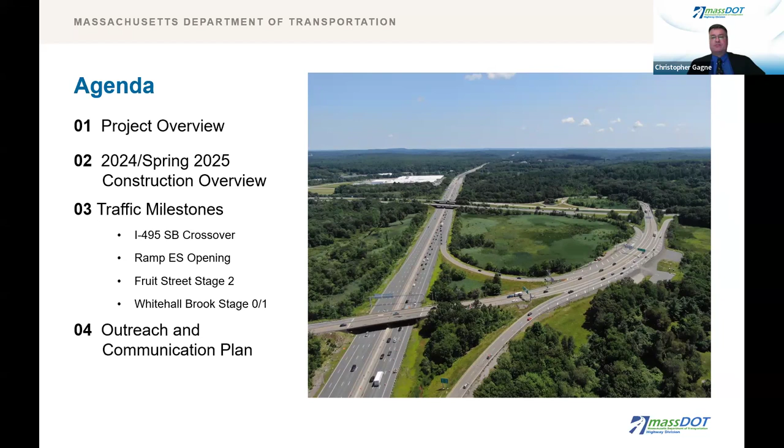Following the presentation, we will open the meeting up for questions and responses by our team. Also, it's important to note that there will be multiple ways for people to receive information about the project as it progresses through construction. These will be covered at the end of the presentation.

Tonight's panel includes representatives from Mass DOT: myself, Christopher Gagne, the PM, Jean-Pierre Telemaque, Assistant Construction Engineer from District 3, Joe Frawley, District 3 Operations Engineer, and our producers Hung Pham and Roy Kirwa; from the Design Build team, Mark Shamp, the Project Manager from Barletta Heavy Division, Howard Goldberg from Barletta, Don Cooke, the Design Manager from VHB, Josh Cone-Roddy, VHB's Highway Lead, and Keith Sonia from Regina Villa Associates, presenting on outreach.

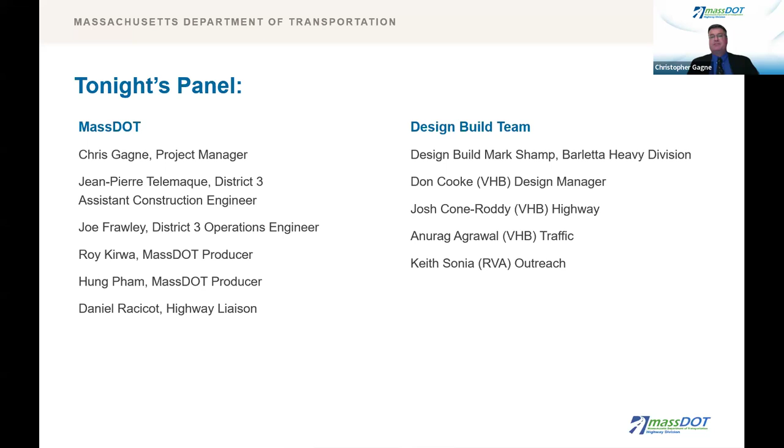Before we get into the details further into the presentation, I want to make some high-level points about the project. This is one of the largest projects MassDOT has advertised for construction since inception in 2009. It is the only interstate to interstate interchange reconstruction ever taken on by MassDOT.

On an average day, well over 200,000 vehicles pass by or through this interchange. 50% of the state's commercial truck traffic passes through this interchange on an average day, and the interchange has been what we consider an interim condition since MassDOT implemented AET on I-90 and removed the legacy toll booths in 2016 and 2017. We knew at the time that a larger project to completely update and modernize the interchange would be needed, which led to this project.

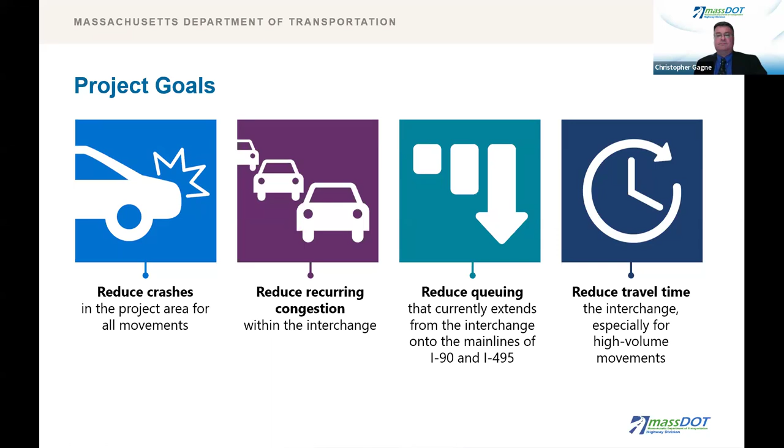Project goals: the interchange is plagued by chronic congestion, which leads to extensive backups on both 495 and I-90. Long queuing and congestion lead to long travel times throughout the area, as well as crashes. Substandard geometry and traffic weaves lead to crashes and rollovers. Remember that this interchange was originally designed for traffic to stop to pay their tolls. This project addresses all of these issues.

Our schedule. This slide is on the project schedule. The project is currently in stage 1, and this construction season will begin stage 2. I will now hand the presentation to Don Cooke from VHB.

Thanks, Chris. This project is a design build procurement, and there are two primary procurement methods used by MassDOT: design bid build and design build. As a design build project, that involves a preliminary design being developed and permitted by others, as opposed to design bid build, where the final design is finalized before going out for advertisement.

Our team was selected to advance the preliminary design to final design and then to construct the new interchange. This project will therefore have concurrent design and construction happening over the 5-year total project duration. We are almost done advancing the preliminary design to final design. And for those of you who have been to our previous meetings, you know we presented each element of the design at previous public information meetings.

As you are probably also aware, construction has commenced. Tonight, we will focus on an update to the current and upcoming construction activities, as well as related traffic changes and milestones.

From a staging perspective, we have completed stage 0, which included early enabling work such as fiber optic cable relocation. And we are currently in stage 1, which includes continued work in the 495 median and future 495 bridges over I-90 and the railroad, Fruit Street Bridge construction, as well as work on ramps ES and WN, all of which we'll go into more detail tonight.

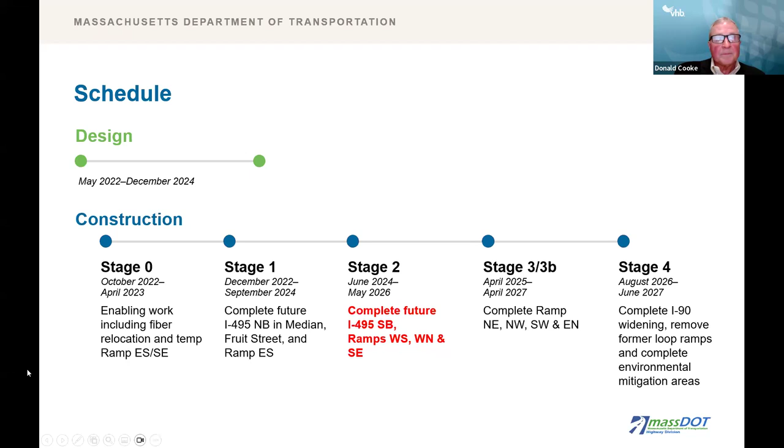So I'd like to start off with a general overview of the project for those who may have not been at some of our earlier meetings, followed by a more focused discussion on construction updates and upcoming traffic pattern changes. We've already covered a lot at our previous public information meetings.

We had a general project overview meeting at the end of 2022. We presented Fruit Street and ramp ES and SE design details in January of last year. We presented I-495 and ramp WN in April of last year. And we presented I-90 and the 5 remaining new interchange ramps in September of 2023. All of the previous meeting materials can be found on the project website.

In general, the project limits extend about 3/4 of a mile in each direction along I-90 and I-495. The project includes complete replacement of the interchange. And the new interchange is to be constructed in an extremely sensitive environmental resource area, which continues to inform our design development as well as construction.

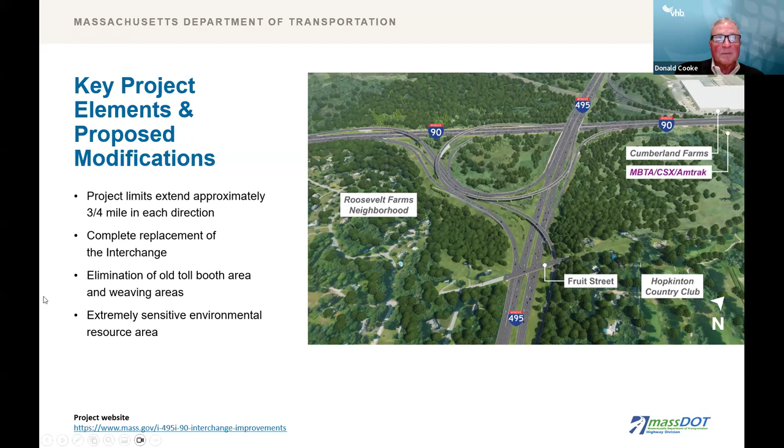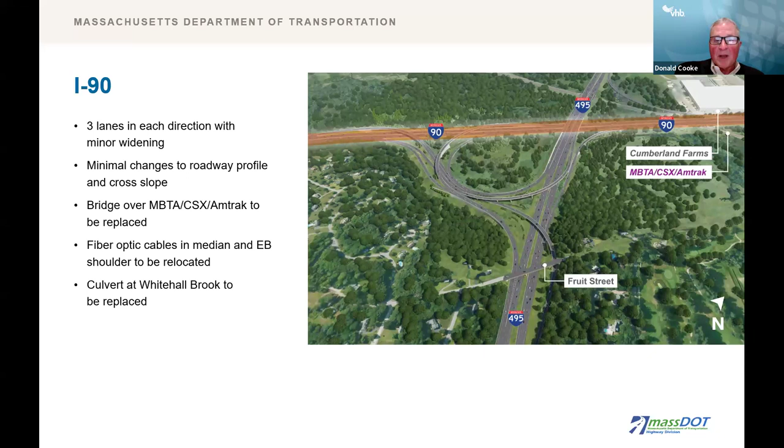Future I-90 will provide 3 lanes per direction as it does today. There will be minor horizontal and vertical changes to accommodate the new interchange ramps. The I-90 bridge over the MBTA commuter rail and the I-90 culvert at Whitehall Brook will both be replaced.

Similarly, future 495 will also provide 3 lanes per direction as it does today. A major change that we will discuss tonight is that the future 495 northbound is currently being constructed in the existing median. I-495 southbound essentially stays where it is today. This will allow us to stage traffic during construction.

Once the roadway is constructed in the median, we will temporarily move 495 southbound traffic to the median, while the future 495 southbound is being rebuilt in its existing footprint. Once that is complete, we will move 495 southbound to its final location and then ultimately move 495 northbound traffic permanently into the existing median area.

Similarly, 495 bridges over I-90 and the MBTA commuter rail are being completely replaced. The 495 northbound bridge over Flanders Road will be rehabilitated with a superstructure replacement. There will be a 4th lane developed northbound from this interchange extending north to the Route 9 interchange.

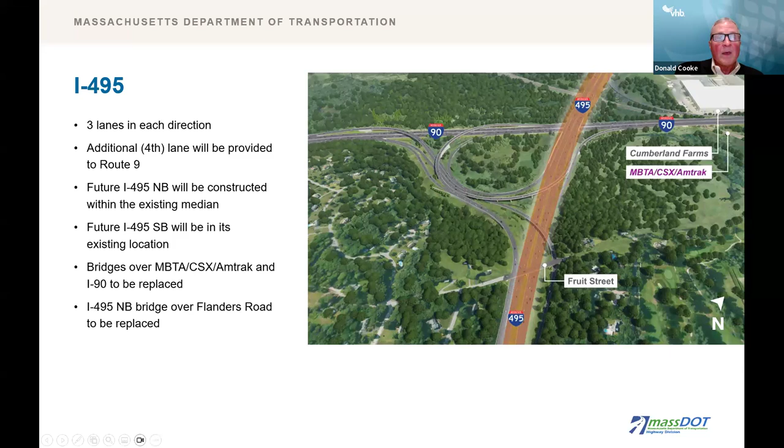So those are the 2 main lines. I'd like to talk a little bit about the new ramp configurations. You've already heard a little bit tonight, so I just want to make sure everybody's aware. When we talk about ramp designations, it's not overly complicated.

When you see a ramp WN, for example, in the upper right-hand corner, it means the ramp that will take I-90 westbound to 495 northbound, WN. For example, ramps ES take I-90 eastbound to 495 southbound. So we'll use those ramp designations throughout the night, hopefully you can stay up on what we're talking about. And I apologize, we've been living this for a couple of years now, so it becomes sort of a second language for us.

As far as the ramp and the interchange itself, there are 8 completely new ramps being constructed. This will accommodate movements to and from I-90 east and westbound and I-495 north and southbound. The proposed ramps include direct connections, such as the ramp from 90 eastbound to 495 southbound and 90 westbound to 495 northbound. But there will also be ramps that include semi-direct and loop ramp connections to accommodate the rest of the required movements at the interchange.

A number of the new ramps travel through the old toll plaza area, in this area here of the existing and future interchange. This allowed us to minimize impacts to surrounding environmental resource areas. However, in the future, they are separated both horizontally and vertically to eliminate the need to merge and weave through that area as you need to today.

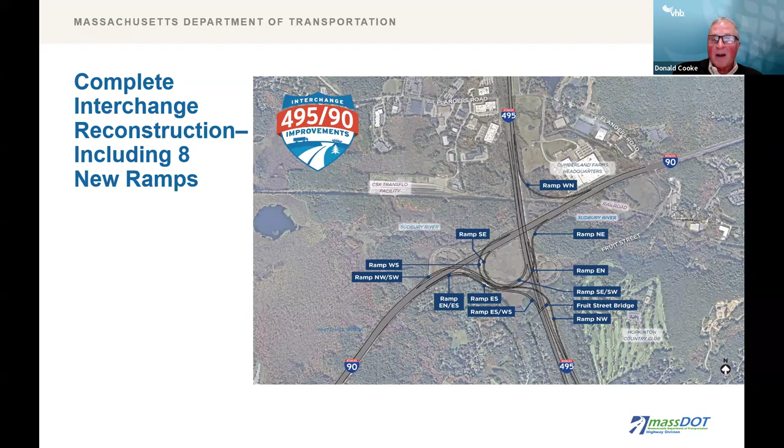In addition to the interchange reconstruction, there are 2 other elements to the project. As many of you probably are aware, the Fruit Street Bridge over 495 will be replaced completely in 2 major stages. Throughout that, we will maintain 1 lane of alternating traffic under signal control. The first major stage of Fruit Street is currently under construction. This work also includes roadway work on the approaches, utilities, and some landscaping features in and around the Fruit Street Bridge area.

I mentioned a little bit earlier, Flanders Road. The 495 northbound bridge over Flanders Road will be replaced, its superstructure only. It will be constructed with an overbuild to maintain 3 lanes of travel on 495 northbound during all peak periods. There also will be some limited roadway and utility work below on Flanders Road.

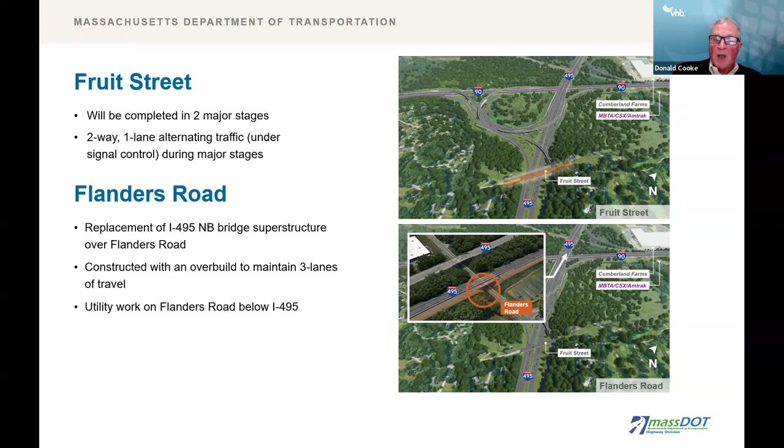I'd like to take a few minutes to talk about items that are also typically of most concern to abutters and people who use the interchange. First, the interchange is being reconstructed in an extremely sensitive environmental resource area. Permits were issued during preliminary design, but they continue to inform all aspects of our final design and construction. Existing resource areas include the Cedar Swamp, ACEC, the Sudbury River, Whitehall Brook, as well as surrounding wetlands and floodplains.

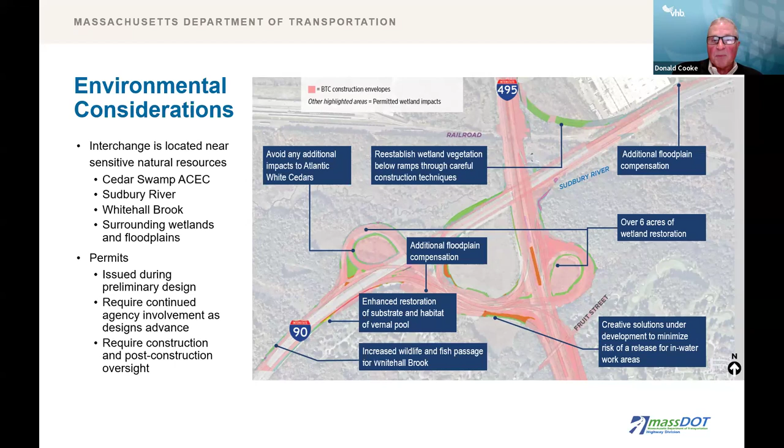We are, as a team, in close coordination with MassDOT Environmental, but also with DEP and the Army Corps of Engineers. This coordination has been ongoing during design advancement, but will continue during and post-construction to assure compliance with the permits and that the required mitigation is provided.

From a traffic perspective, on the main lines of I-90 and 495, the existing 3 lanes will be maintained except for short-term closures during off-peak hours, primarily overnight. All ramp connections between I-90 and 495 will be maintained, perhaps in a temporary alignment, but they will be maintained.

From a local roadways perspective, Fruit Street, as mentioned, 1 lane will be maintained for alternating 2-way traffic under temporary signal control, and there could possibly be limited full closures at key stages in transitioning during construction. At Flanders Road, short-term lane closures on Flanders Road below 495 northbound may be necessary to support bridge and utility work.

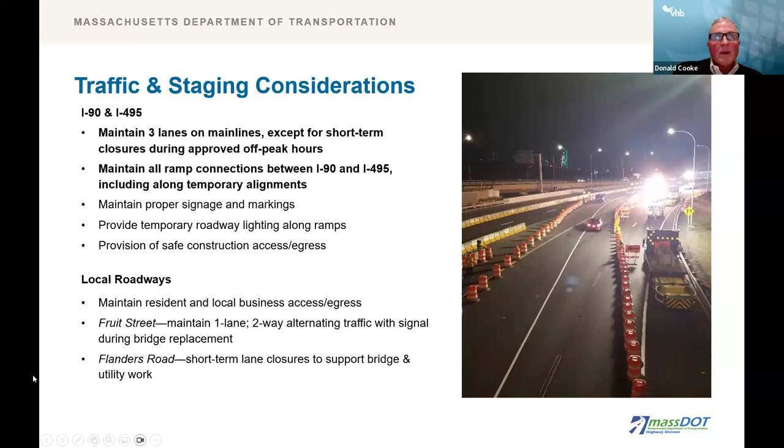So that's the general overview of the project. Tonight we'd like to focus a little bit on both what's ongoing from a construction standpoint, but also what you should expect to see from a construction activity perspective over the next calendar year.

So currently there are a number of proposed interchange elements under construction. The 2 future northbound bridges carrying I-495 over I-90 and the railroad are currently under construction. As mentioned, the first stage of Fruit Street, the northern portion, is wrapping up. Construction of ramp ES, the connection between I-90 eastbound and 495 southbound, is well underway. Ramp WN in the northeasterly quadrant of the interchange adjacent to Cumberland Farms is also under construction.

There are 2 other components not shown on the graphic. One is we are already starting to widen 495 northbound over Flanders Road to prepare for that superstructure replacement. And we are starting some foundation work on some of the ramp WS piers.

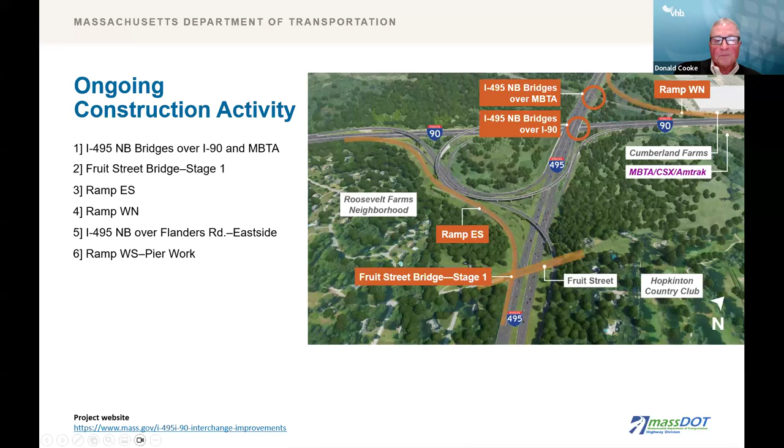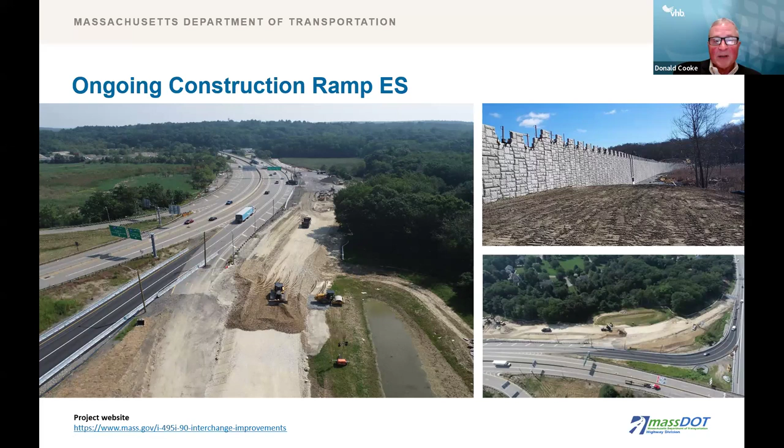One last thing I'd like to touch on is ramp ES. We've started construction on ramp ES. You can see pictures of the bulkhead, which allows us to launch out into the trestle, which needs to be built first, adjacent to the future ramp and bridges.

That trestle is actually completed now. In this aerial it was about maybe two-thirds done, but it's actually complete through that existing wetland and pond area. We've begun construction on some of the coffer dams, which are needed to prepare some of the substructure and foundation elements.

So that's all that's going on now—not all that's going on, but that's everything that's going on from a large perspective currently. But we thought we'd talk a little bit about what you'll see in the coming months.

After existing 495 southbound is shifted into the median area, construction will begin on the future 495 southbound bridges over I-90 and the MBTA commuter rail. Similarly, work on the future 495 southbound main line will start, essentially in the footprint of the existing I-495 southbound barrel.

Traffic will be shifted to the newly constructed side of Fruit Street, and demolition of the remaining structure and construction of the rest of the proposed Fruit Street Bridge will begin. Work will continue on WS and also get started on SE.

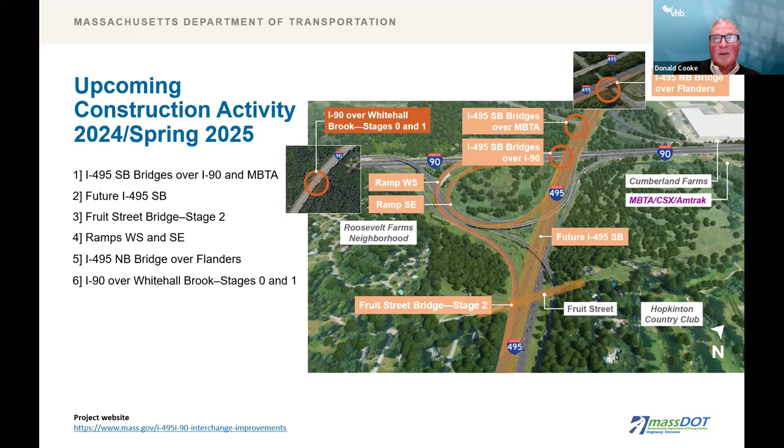Initial stages of I-90 over Whitehall Brook will begin, and some of these we're going to get into much more detail in a little bit. Finally, work on the I-90 bridge over the railroad will also start within the next calendar year.

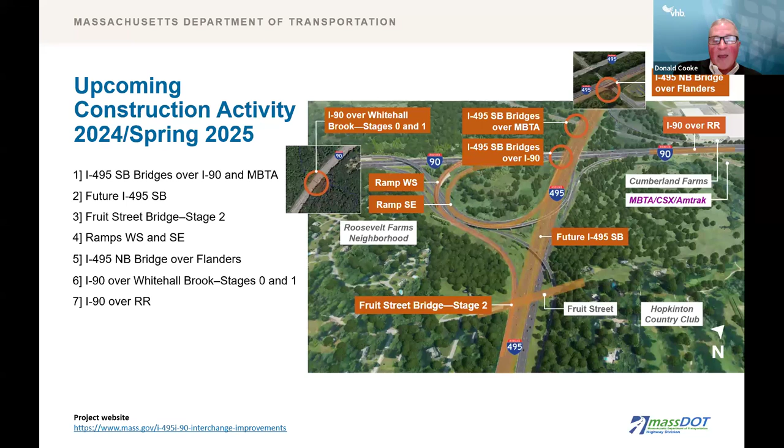When we turn all of these on, you can see a large portion of the project site will have construction activity in 2024 and early 2025. I'd like to turn it over now to Anu from our team to discuss some upcoming traffic pattern changes related to this construction. Anu? Thanks, Don.

So I am going to discuss the upcoming major traffic shifts in much greater detail that are expected within the project area in the next year or so.

The implementation schedule is sometime in summer 2024, post Memorial Day. In the next few slides, we are going to take a deeper dive into this crossover, starting from the northern end and finishing at the southern end.

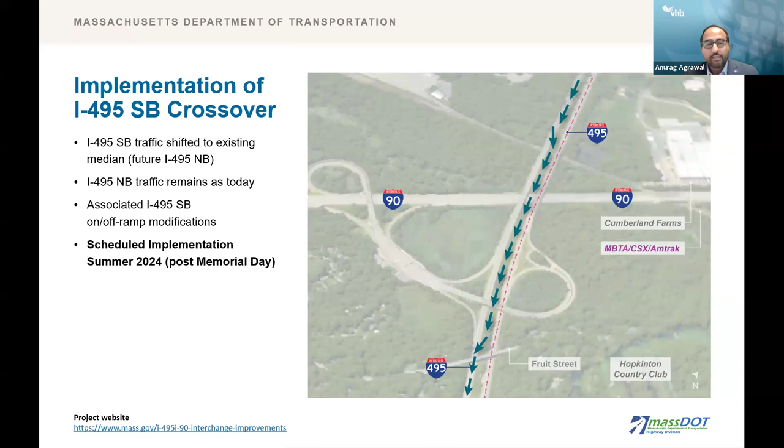We will go further south into the southern limits. This time we are going to look at the southern crossover, shown by the orange circle in the left image. On the right, you can see the 495 southbound crossover in blue, and all 3 lanes will be coming out of the median and joining back with the existing southbound alignment.

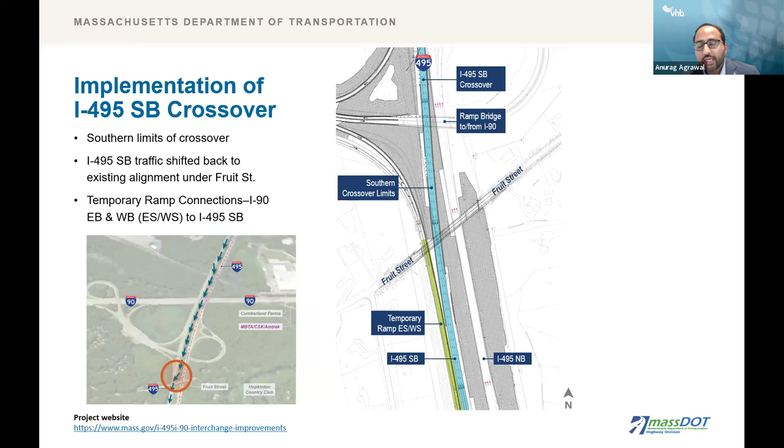The temporary 495 on-ramp, the ESWS ramp, will be coming from I-90 via the toll plaza and joining this 495 southbound main line, shown in green in the right image. That completes our journey of this 495 southbound crossover. Next, we will look at the ramp ES opening.

Ramp ES is a proposed direct ramp that connects I-90 eastbound to I-495 southbound. This ramp is scheduled to open sometime in fall of 2024. The next few slides will walk through the alignment of this new ramp, starting with the off-ramp that leaves the I-90 eastbound main line and ending at where it joins the 495 southbound main line. Let's take a look.

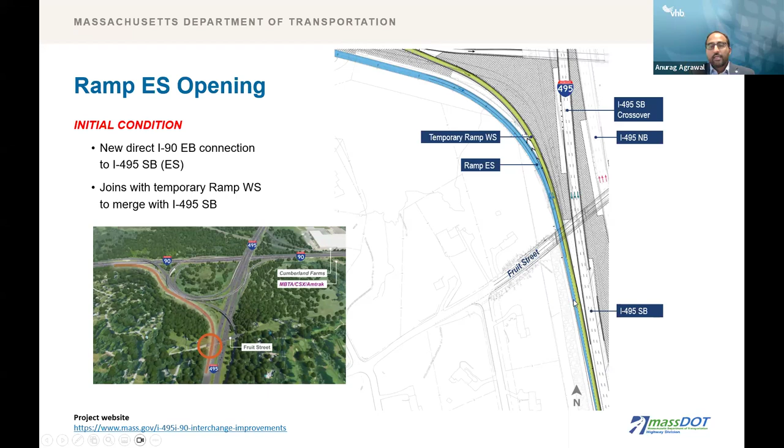I'll now hand over to Don to talk about other major traffic shifts this year. Don?

Thanks, Anu. We had mentioned Fruit Street a few times tonight, but just to add a little more detail: later this summer, once the final utility coordination is complete, traffic on the side of the bridge that's been under construction, the newer bridge, will be shifted onto that newly constructed portion. Traffic will continue to be accommodated in a single lane, providing two-way travel under signal control, while the rest of the old Fruit Street Bridge will be demolished and reconstructed. We expect this shift to take place this summer as soon as the final utility coordination is complete.

The last piece we'd like to touch on tonight is Whitehall Brook. For most people traveling on I-90, you probably don't even realize you travel over a brook just west of the existing interchange. That's Whitehall Brook. The structure that carries I-90 over that brook is part of this project, which includes rehabilitation and replacement of that structure.

Thank you guys. So our first question is from Brad Fenn. Question on the Fruit Street bridge work: as shown in the phase 1 ongoing picture, eastbound was removed and rebuilt. In the picture, you can see wood framing under the westbound lane. Will the northwest lane go through that section? If so, that means a good deal of earth will be removed from 495 North and the homes along Saddle Hill Road. Is this correct?

Thank you, Roy. Brad, yes, to answer the first part of your question, ramp NW will be placed under the Fruit Street Bridge, and there will be a retaining wall along that ramp. That'll be a soil nail retaining wall. There will be some necessary soil to be removed, but the remaining soil will be retained with a retaining wall.

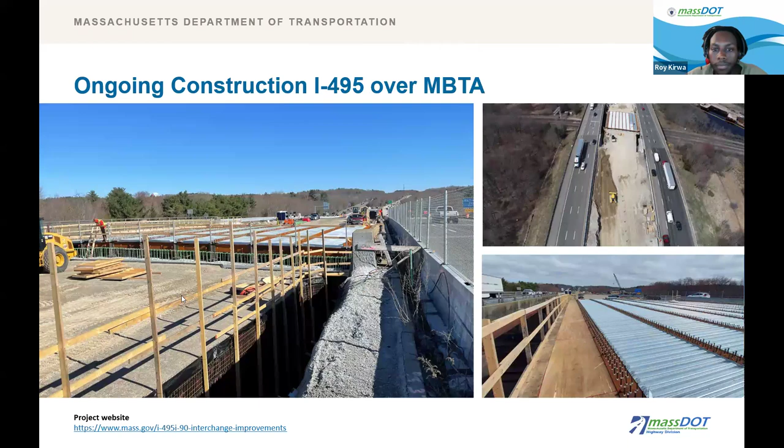Brad has a follow-up question on that: so the lane will go where the wood wall is located?

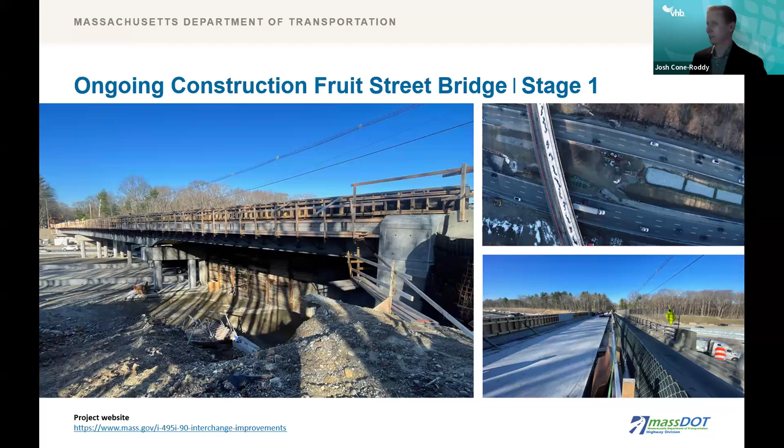So ramp NW is actually, the concrete wall at the very right side of the picture, that's the future abutment. Ramp NW is going to be about 5 feet to the left of that. So it's not going fully under where that wall is, but a partial portion of where that wall is was where ramp NW will be located. Some of the renderings on slide 33, I think, show that in the proposed condition.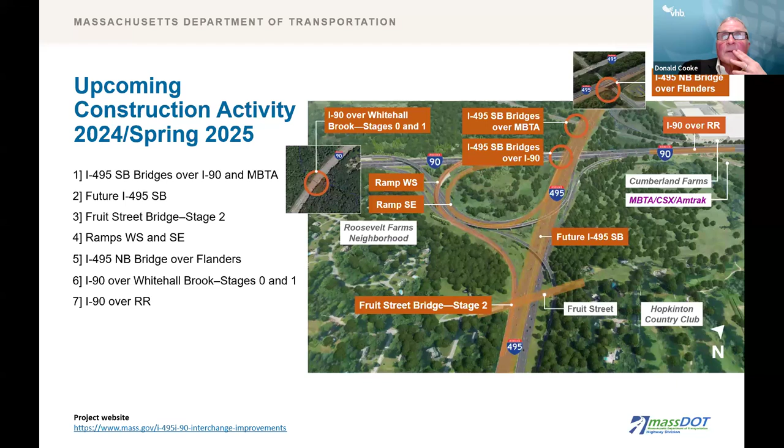Or any of these really. This one has it too. Sorry, I'll get to it - my PowerPoint's on a bit of a lag. Apologize, it's getting there, it's thinking about it.

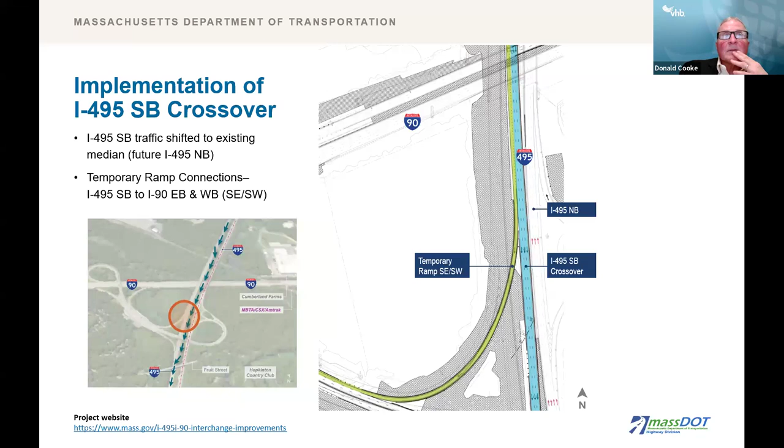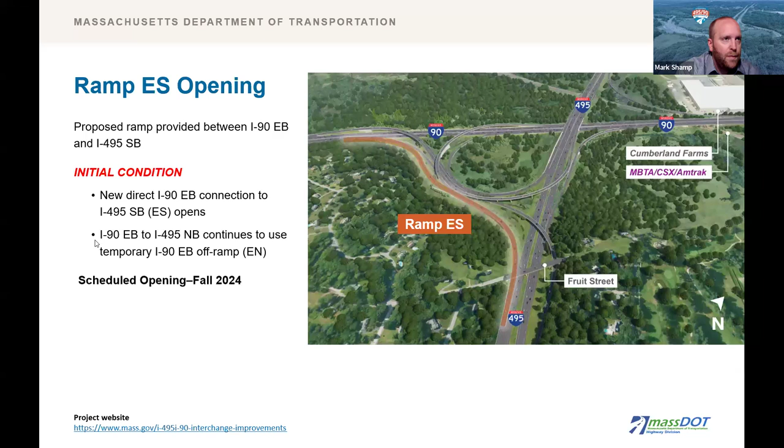We're finishing up the first phase right now. You'll see as we get into these next upcoming weeks, we're putting in the snow fence along the bridge, finishing up the minor bits of concrete work that we have left, and then moving into June, we're planning early June, right after Memorial Day, to waterproof and pave the bridge structure.

There's one component that's a third-party utility - Eversource, Comcast, and Verizon - you'll see them out there within the next couple months performing their work, the aerial work, underground work, and splicing work. We're planning on that to be complete, hopefully by end of June, early July, something we can't entirely control. It's based on their schedule, but we're pushing for them to be complete somewhere around the 4th of July.

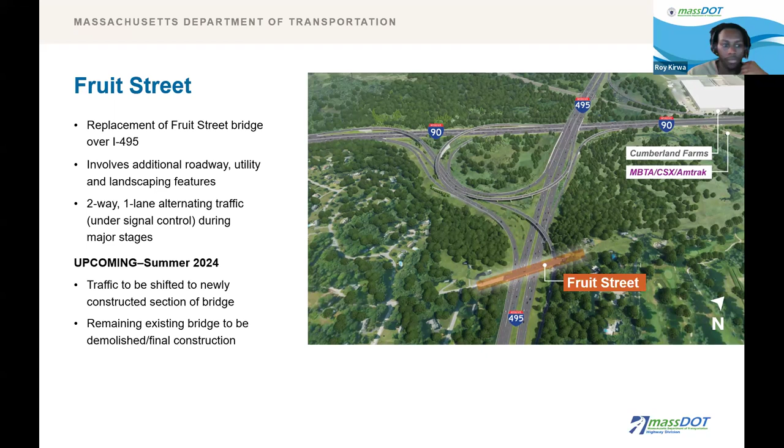Currently, what we're projecting for closures would be minimized to probably overnight or a weekend, when we complete the second phase of Fruit Street. The majority of the work will be complete on the bridge structure, but it's the approaches on either side—the roadway has to come up and grade a couple feet. So we may have to close Fruit Street just to do the full depth construction on either side of the bridge. The only thing I'm not entirely sure of is, again, third-party utilities—there may be some intermittent closures for them to perform their work, and I'm sure once we know of those, they'll be communicated to the public.

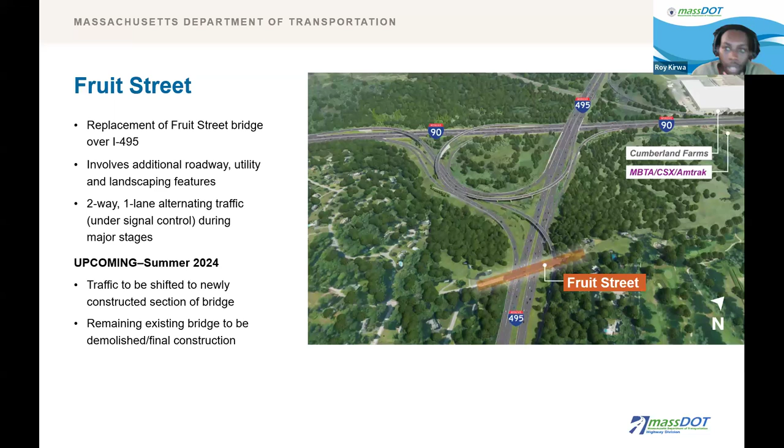So I see no questions right now, so I think this would be a good time to put up the contact page for the project, just so that anybody who wants to share further comments or questions after the hearing knows how to do so. If you scan that QR code, that'll take you to the project website. Also, the project email is listed there, so for any further questions or comments, please feel free to send it to that email address.

Roy, it looks like we don't have any upcoming questions, hand raised, or phone in. Give it a few more beats. Yeah, I'd say we could give it a moment. We did get a comment from Brad: thank you for this session, very helpful. Thank you, Brad.